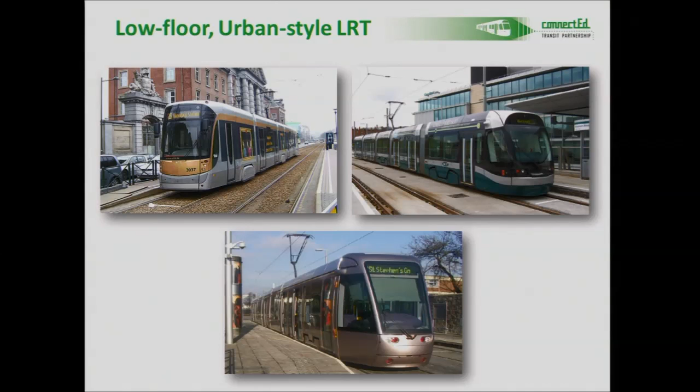Several of these systems have now been built in North America, places like Seattle, Phoenix, Salt Lake City, Minneapolis. There's a few of them around, not very many.

But the key difference is that the vehicle is a low-floor vehicle, and they put all of the mechanical and electrical systems on top of the vehicle so that they can lower the body down, and you don't need these great big LRT platforms that we're used to seeing in Edmonton and in Calgary. So it's much more integrated with the community.

You can sort of wander out on the tracks if you want to. We don't advocate that, of course, but it's meant to be very integrated and give a whole different feeling to the streetscape. It's meant to spark transit-oriented development and be a catalyst for urban renewal. There's a lot of advantages to using a low-floor, urban-style LRT system. So that's what we're going to be building with the Southeast to West.

A few project stats, just to give you some context. It's a 27-kilometer long system from Millwoods Town Center out to Lewis Farms. Along that, there are 24 or 25 stops, depending on which day it is - there's one that was in and out again - and 3 stations. A station is one that has vertical circulation, so it's elevated or connects down to something underground.

The other 25 primary stops are, I'll call it, a bit of a glorified bus stop, to give you a sense. It's not an LRT platform in the traditional way that we know them here in Edmonton or in Calgary. There's a tunnel section downtown, a bunch of bridges, a couple kilometers worth of elevated guideway - there's an elevated guideway rendering from BIM in the background there - and there'll be lots of civil road work and an operation maintenance facility and operation control center.

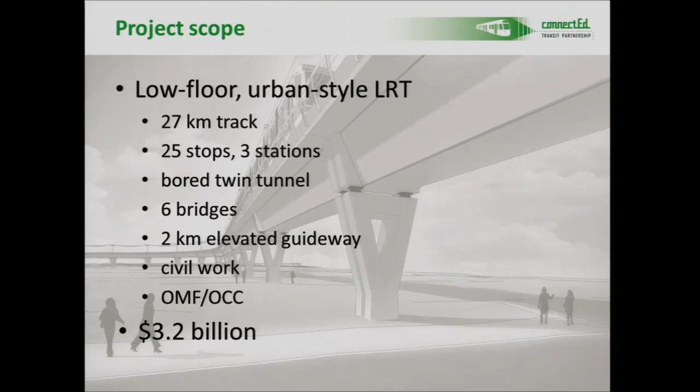Total project, if it's all built, will all be built eventually. The first phase is the southeast piece from downtown to Millwoods, but the total project right now has a budget of about $3.2 billion.

System map - I won't dwell on this, but down in the bottom right is Millwoods Town Center, and over on the left-hand side is Lewis Farms. It runs up the east side of the city, goes right through the river valley into downtown. Again, this is at grade, right through downtown on 102nd Avenue, and then out to the west end.

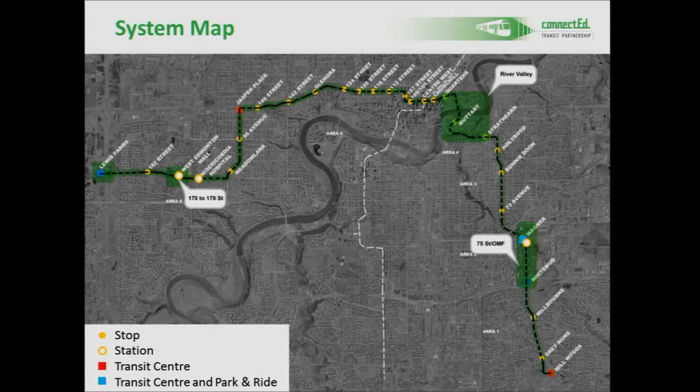A key question for reflection this morning is why BIM, and how are you doing this on such a big project? The reality was when the ConnectEd Transit Partnership was given the commission to work on this project, there was originally no thought of using BIM on it. We suggested to the city of Edmonton, we said, hey, this is a project that's going to take 8 years, 10 years, who knows how long to build and get operational.

And it's going to be operational for the next 75 or 100 years. We need to be thinking ahead to where the design world, the operations, the asset management, all that stuff is going, and we need to prepare the project for that. So we proposed to the city to use BIM on the project.

Here are the key value propositions that were discussed in that decision to use BIM at all. We wanted to extend the shelf life of the design. For example, we know that the city is prioritizing, because of the funding arrangements, the southeast piece from downtown to Millwoods. The west is also a high priority, but the funding is maybe a little bit further out, and there's a question mark around how quickly the whole system will be built.

So we wanted to future-proof the design information and not be stuck using some old-fashioned 2D CAD stuff when, maybe 5 or 10 years from now, they want to build the West, and that's going to be completely obsolete. We wanted to future-proof the design information and just essentially use forward-looking technology. Let's not do things the way that they've been done before simply because they've been done that way before. Of course, there are benefits of BIM for visualization.

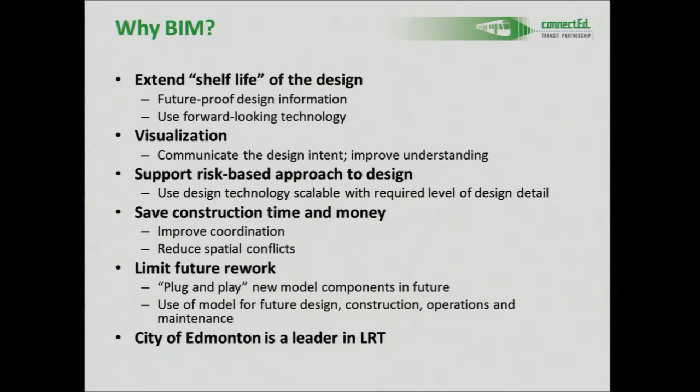For elements in the design that carry risk, whether it's schedule risk, cost risk, technical risk, or whatever, we're prioritizing more design effort on those elements in order to bring the risk associated with those elements down, and therefore improve our ability to control uncertainty with those once things go out for bid.

That means different system components are being designed to different levels of detail, and we needed a technology that was going to be scalable with the level of detail we were going to design to during preliminary engineering. Of course, BIM does that for us.

You've heard lots about the benefits of saving time and money in construction, so I won't dwell on that. Really, this circles back maybe to the shelf life of the design.

We want to limit future rework. Everything we're doing now, we want to put into a format that can be best picked up by someone else in the future, whether it's a P3 contractor or the City of Edmonton or whomever is using this model information in the future. Let them be able to pick it up and run with it.

And last, and this is key, the City of Edmonton is a leader in LRT. The City of Edmonton built the first LRT system as we know it in North America back in 1978, I think it was. And they want to continue to be a leader in using appropriate and advanced technologies to deliver this project.

Now, if you accept the fact that doing BIM is a good idea, the next big audacious question to answer is how much and how do we do it? We needed to educate the City of Edmonton, and frankly the whole design team, about some background on BIM and some basic concepts and principles.

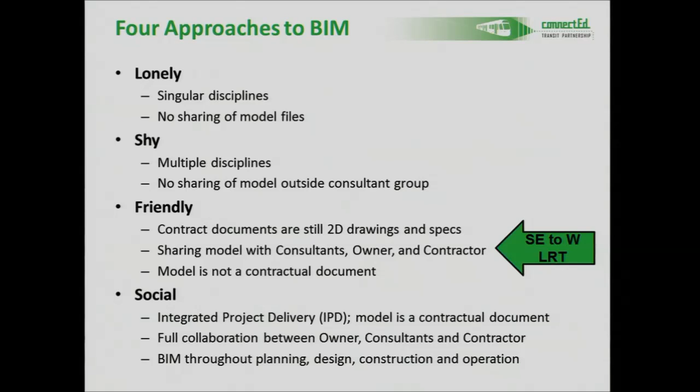This is where most of the world is right now, with many of our projects that I work on, other than LRT, sort of in this friendly BIM world. We want to work really hard to get to the full social BIM, which has an integrated project delivery approach, where we share the model more openly and everybody adds value to the model. But there are a lot of hurdles that need to be worked out before that can work on a regular basis.

So, key principles. When we entered this project, we actually had some people telling us we couldn't do it. And for anybody that knows me, telling me that something can't be done is like waving a red flag in front of a bull. Don't tell me that. But it was wise to listen to those words, because you can't bite off more than you can chew. We saw Landmark using a phased approach, every six months increasing the amount of BIM in their manufacturing process.

We're trying to do the same sort of thing. Take our team, some of whom had BIM experience, others did not have any BIM experience whatsoever. We need to bring them together, show them what's possible, and then make smart decisions about the specific things that would benefit most from BIM on this project. So our key principles were: don't bite off more than we can chew, and the model is not yet, at least, a contractual document.

We wanted to leave our various disciplines alone. We didn't want to tell track designers, oh, you can't use the software you're used to, you've got to use something else. That wouldn't work. We wanted folks to be able to use the software and tools best suited to their particular discipline, whether it's track, bridges, buildings, or whatever.

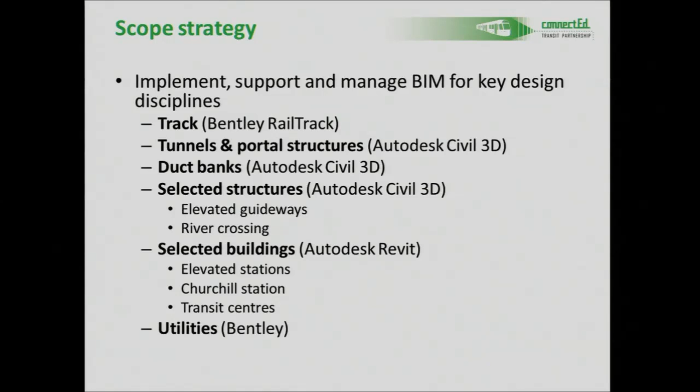And so that allows us the capability of doing coordination and design visualization and all of that great stuff with all of this information when we bring it together. So with that said, I'll pass the baton over to Justin, who will talk about how we actually bring all that stuff together.

Thanks, Jeff. Wow, I now know what an ant feels like underneath a microscope.

So, first of all, who knows what BIM software is? Hands up. Good, I've got the right audience to start with.

So it's not actually software. It's a mindset, a way of sharing, a theory of sharing and collaborating together. The one thing we always forget is how to actually do that. Everybody jumps in and says, I have a software for this, I have a theory for this, and it's fine, but no one actually teaches it and gets everybody on board right at the beginning. That's fail number one. If the mindset isn't within your team, you are done from the start. So invest in doing that first, which is what we did.

So the idea of me standing up here today is not to say look how great we did. It's to actually share with Jeff and Josh how we're actually doing it. So we're giving all our secrets away, which is beneficial to you guys.

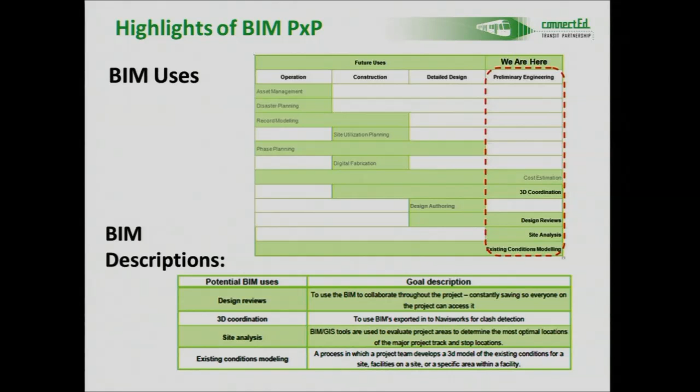Did that change? No. There you go.

Okay, so the PXP - now the universal translator, this is really easy, it's done. We've already got it. We have this translator that takes all the software and puts it into one place, one environment. So don't think about that too much - think about how you're actually going to use it.

What we are not thinking about is how to use it - we just say it's there. So go back to basics again, think of the end in mind again. The first couple of tasks we had to think about before we all started running off and modeling was how we're going to get all the models to stitch together.

We had to ensure that when you brought one model in and overlapped it - which I'll show you on my end slide - it would look right once they were built around each other and began to gel. I don't want to give away my last slide too much.

The second task was to ensure they were in the correct units - again, absolute basics. Now, tasks 1 and 2 are only achievable if you know how. So how did we solve it? As a team, where did we put it? In the project execution plan.

I'll use an example. We recently had the Vancouver team join us from an architectural standpoint to wrap the Wagner station, one of the stations down to the south of the track - if you were looking at the map, it'd be around the bottom right. They had to add in their architectural elements, and they did it by reading the PXP, so they knew where everything was. They were up and running in a day, and had the model finished as placeholders just to say don't hit any of my stuff. I'm taking this wrapping and putting a box around Wagner Station - that's mine, don't go near it. They had that done in a day.

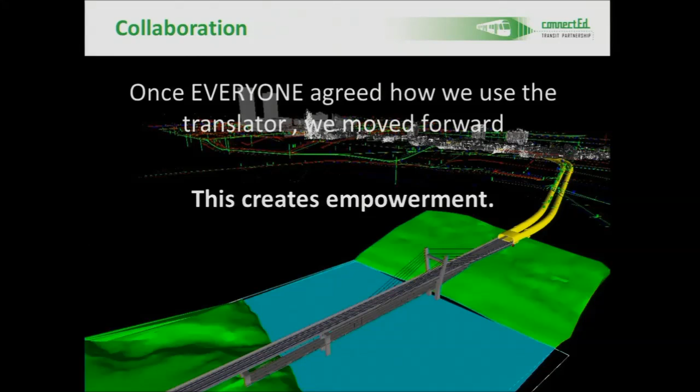With the basics out the way, we then had to talk even more about the more advanced features - how we were going to report the clashes, review the captures, add notes - all of which had to be added to one place, which again was the project execution plan. So this project execution plan is expanding and becoming the rule book. We're using it on a number of other projects within DIALOG at the moment.

It's actually proving very beneficial to keep everybody on the same page. I don't know of any other document that's keeping everybody on the same page when it comes to BIM, so I'd love to hear it from you afterwards - I'll expand my knowledge as well. The whole point of this forum is for us to speak.

Again, I've done this before on other projects - how to produce clash reports. With a little bit of manipulation, you can make them feel that it's actually their decisions and they come up with it, and I think that's just fantastic. A little bit of manipulation - it's not bad.

The background here, as you can see, is a clash recording - this is just a viewpoint. We've added some notes on there. Just under the word clashes, there's a distance between the two top piers of the bridge, and we just put a little note in there. The number 2, which is going off, is just a way of us tracking the comments.

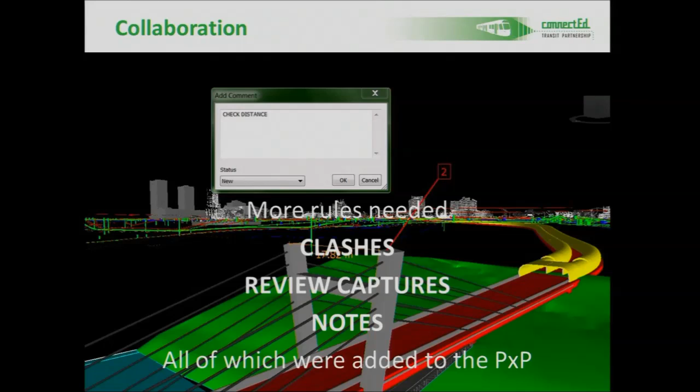So using this single platform - excuse the pun, but we've got Wagner Station here, the platform - we have weekly BIM model review meetings. This brings the models together. We don't want people to work in their silos, which is why we're having these more and more frequently.

On a previous project, going back 8 or 9 years now, we were having these design review meetings or model review meetings 3 times a day. And I can imagine Josh is having a little miniature heart attack in his chair there, thinking of how much time I'm going to steal in the main boardroom. But these become more and more frequent. Again, the whole way that we hold these meetings has been decided by the team and not myself. It's really important.

You've all heard of the MacLeamy curve, I would hope. Just a show of hands. Okay, you recognize it when you see it. It's 4 lines on a graph. And what it says is basically, if we can put more effort into the design and speed it up by using technology to apply our theory, then we can save more money when it comes to the construction phase of the project.

Now, we have all the tools to do that now. We didn't before. So I'm asking you to manipulate what you have and use the software to work for you, not the other way around.

So closing, I'm just going to show you a very quick example. Hands up if you know what point cloud is. Good, now we're getting somewhere. So I don't look so fancy now, which is a shame. Now, point cloud, millions of points - this is from Stewart Weir, who supplied this to us. This is the China Gate in Edmonton, a very familiar site, which is why I used it.

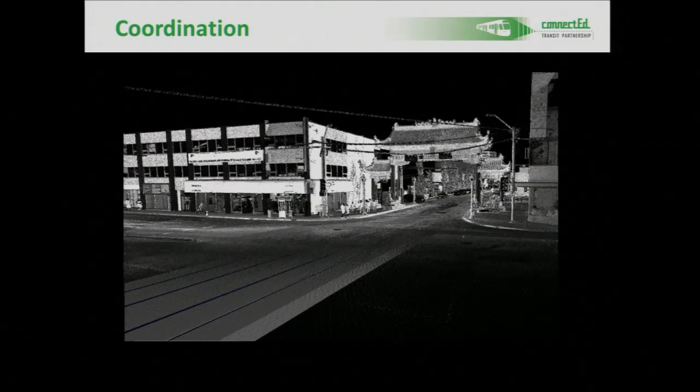We then superimposed the track bed onto the model, which is a separate model, a different software - it's very important to explain. We then superimposed the duct banks, which Jeff mentioned was a very important element of our models, to ensure that they followed the track and that we had some kind of virtual environment of where everything was going to go.

We then added the existing utilities, and it gets a little bit messy - it looks like Spaghetti Junction underneath there. And then we had a no-fly zone, which we had to incorporate and attach to the track, which will show up in red here. Now, as soon as it shows up, we can see that our utilities are really clashing with that no-fly zone, which was something we could not have.

So we call these DEFCONs, 1 to 5, or 5 to 1, whatever way you read it. And we had to ensure that we use these meetings to really manipulate the models and feed information back to the city. So that's my portion. I hope I've explained that clearly.

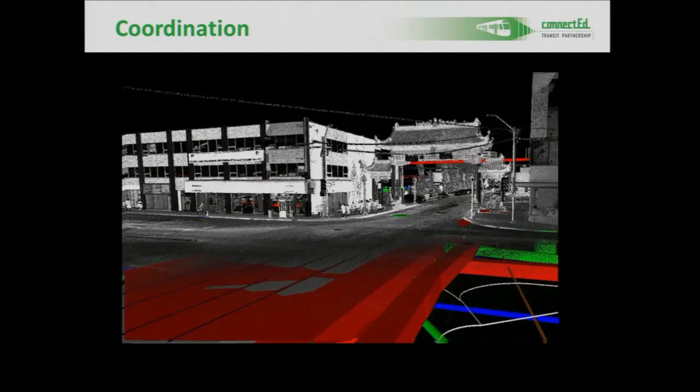The one thing I'd say before I pass on to Josh is keep it simple. I've said this quite a few times in other presentations. It's BIM, okay? And the information can be used as little or as much as you like. If you want to go back to 3D modeling, then just call it 3D modeling. If you need to simplify it in your heads, it can be that simple. The information - let your geeks attach all the information, and then they'll tell you how you can use it later on. Let your team work for you as well.

If you are scared to start, man up. Simple as that, okay? You will be forced to, because the technology drives our industry whether we like it or not. This theory has been planted within us, and it's not going away. And if you still don't feel comfortable, come and ask us - we're open to dialogue, okay.

Thanks, Justin. I have, I think, 4 minutes, so I'm going to try to fly through my slides that I have here.

Now, we've talked a lot about BIM on this project and other projects. Now, it all looks like roses and champagne and all great, but we do have some lessons learned that we wanted to discuss this morning.

So when we approached the city, they were sort of a little leery on it. They said, are we really going to get what we wanted to get? Is it really working the way that we wanted it to do? Well, we've got to take a step back and say, why did we want BIM? Why did we choose it? We chose it for some of those factors that Jeff talked about earlier - risk mitigation, visualization, collaboration. And are we achieving those? Yes. So on our project, the way we measured success was achieving those factors. So yes, it is working the way we wanted it to.